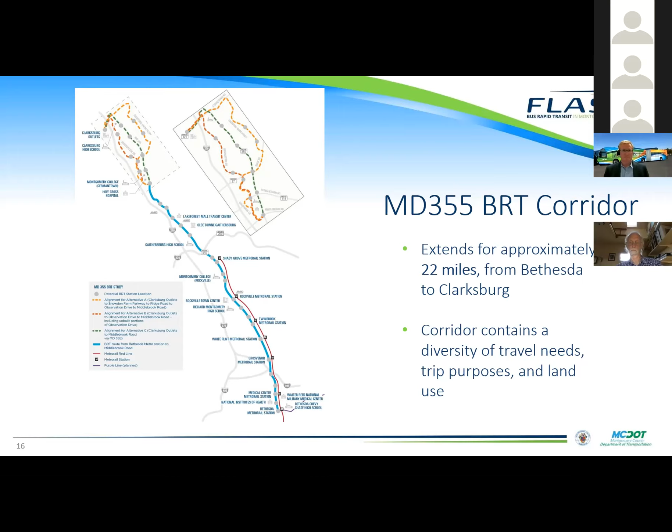Next slide. You all have seen this map already. The corridor extends approximately 22 miles from Bethesda to Clarksburg, and it contains a diversity of travel needs, trip purposes, and land use.

Denny, I'm sorry, I accidentally turned off your video by mistake. I was trying to stop all video. Oh, okay. My apologies. Oh, there. Did you get it? Yep, I'll stop experimenting. All right, great. Okay.

So the design segments, there are 7 design segments, which we've talked about in the past. The project runs from the Bethesda Metro Rail Station in the south to Clarksburg Outlets in the north. You can see this on the map on the right.

For this phase of preliminary design, we are focusing primarily on segments 2 through 6, which includes most of the dedicated running way section. These are the more challenging areas of the project, whereas segments 1 and 7 are operating in mixed traffic, so we aren't focusing on them in this piece of design. However, the BRT service could run beyond the limits of the dedicated infrastructure. Next slide, Randy.

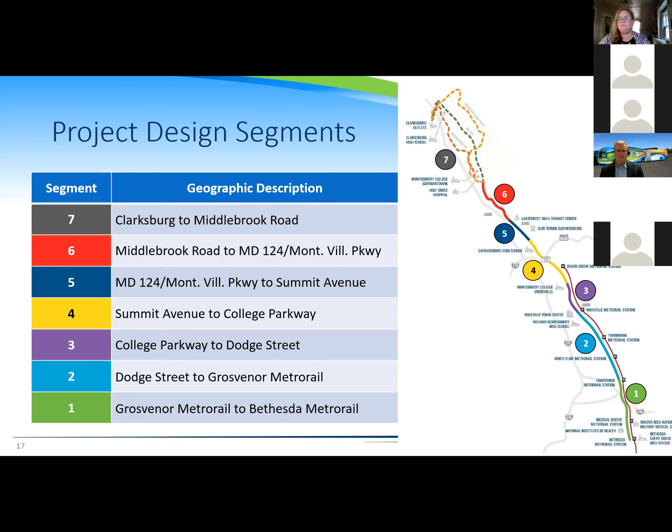Coming out of phase 2 planning, we heard majority support for alternative B modified, including from the County Council T&E Committee, the Transportation and Environment Committee. But there were some questions that weren't quite resolved, so we didn't ask the county to move forward with a locally preferred alternative. We solicited feedback from stakeholders like the cities of Rockville and Gaithersburg, and consequently some of our design ideas have evolved in a few locations, which we'll flesh out as part of preliminary engineering.

The phase 2 planning outcome for alternative B modified includes BRT in dedicated lanes where feasible, a single reversible peak direction dedicated lane north of Rockville in segments 4 through 6, a single fixed southbound dedicated lane in segment 3, and mixed traffic in the far north Clarksburg and South Bethesda segments. We're not focusing on the mixed traffic in the far north and south in this phase of preliminary design.

Two things we're looking at as part of this preliminary design: in segment 3, we may look at different traffic operation treatments rather than just fixed southbound—we might look at it being a peak direction dedicated lane. So we're taking a closer look at the traffic analysis through Rockville, based on feedback from the city of Rockville.

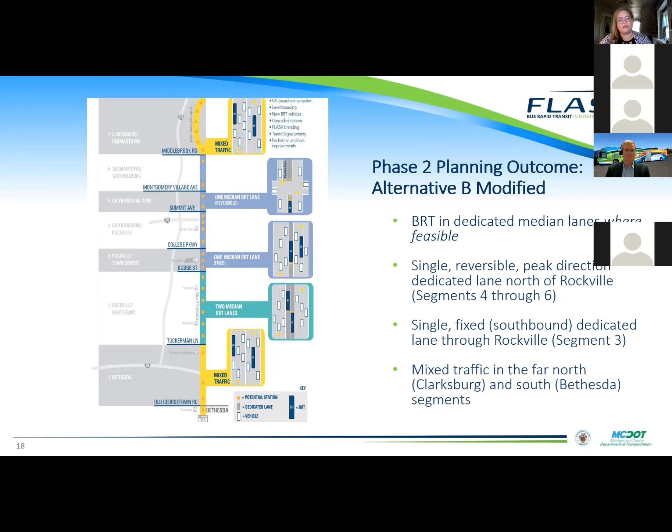So we're taking a look at how we could handle different mixed traffic operations, or something called a business access and transit lane along the curb lane, looking at different technological ways to make mixed traffic operation work a little bit better in the core of Gaithersburg.

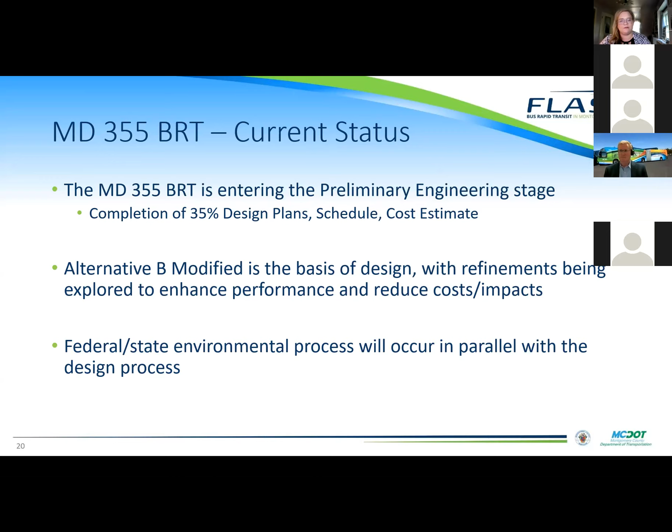Project update and schedule: we are entering the preliminary engineering phase, which includes completion of 35% design plans, a construction schedule, and cost estimate. Alternative B modified is the basis of design, with the refinements previously mentioned being explored to enhance performance and reduce cost and impacts. In addition, federal and state environmental processes will begin and occur in parallel with this design process.

Here's our 'We Are Here' slide, which we've used at many workshops. You were part of phase 1 conceptual planning engineering, where we had previous CAC meetings and looked at all the conceptual alternatives. We identified preliminary impacts and costs, and now we are getting into more detailed preliminary engineering.

We're doing design refinements, surveys, right-of-way, detailed environmental analysis, and detailed schedules and cost estimates. Beyond that, we'll move into more detailed final design and ultimately construction.

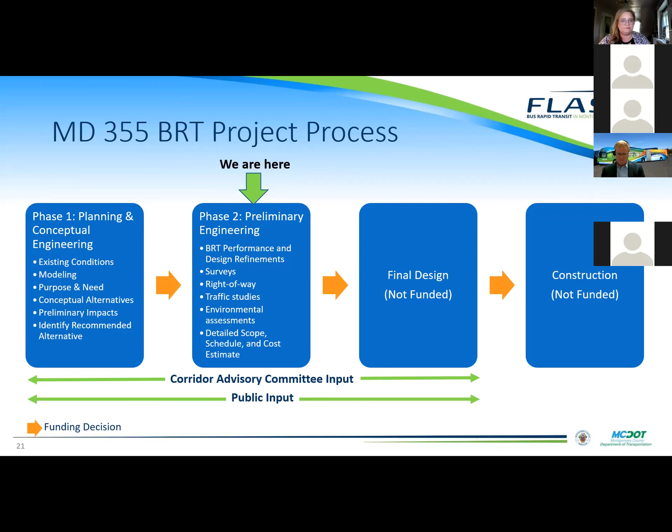Here's a project timeline, another graphic you've seen in the past. We have now stretched it out to reflect where we are in the preliminary engineering phase. We are planning to complete the preliminary engineering by 2022.

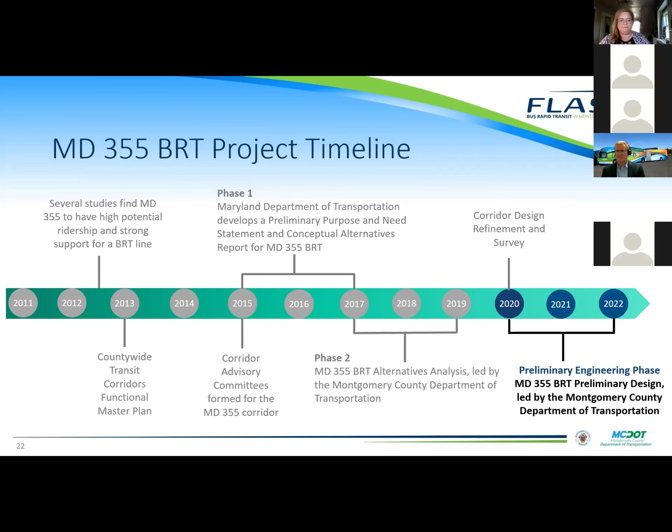Here are key preliminary engineering milestones: the 15% roll plan submission will be completed in summer 2021, with formal adoption of the LPA, locally preferred alternative, in summer or fall of 2021. 25% design progress plans in winter/spring of 2022, then 35% preliminary engineering plans completed in fall 2022, and submission for mandatory referral in fall or winter of 2022.

And then the public review of the environmental process alternative, which might be either a categorical exclusion or an environmental assessment—a NEPA document—in fall or winter of 2022.

Before Randy takes over to talk about some of the design refinements we're looking into and where we're going with it, does anybody have any questions so far?

Okay, thanks, Denny. Can everyone hear me okay? You're all on mute. Let me try to use my cursor pointer if you can see it moving on the slide right now over the title—I'll try to use that to point to some features on the slides.

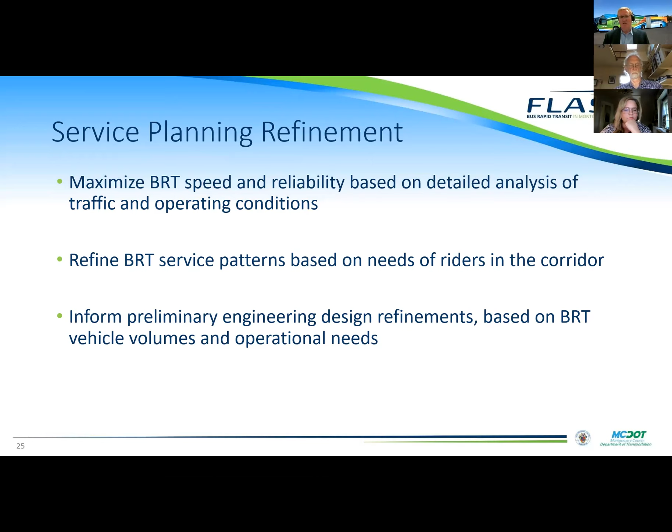Another aspect of the service planning is the combination of the MD355 and Veirs Mill BRTs in a segment from about the Rockville Metro station - just the point where Veirs Mill Road comes into 355, south of Rockville - up through Montgomery College Rockville on the north side of Rockville. As Denny mentioned, there are a number of BRT corridors planned for the county, and these two lines happen to intersect and will be sharing the right-of-way. They'll be sharing stations along this area, providing connections to the south and southeast through the Veirs Mill corridor. So the 355 preliminary engineering team is taking the lead on the design of the shared infrastructure where the 355 and Veirs Mill project intersect. This raises some interesting design questions we're dealing with, and I'll talk in a bit about some of the issues we're looking at around the Montgomery College Rockville campus.

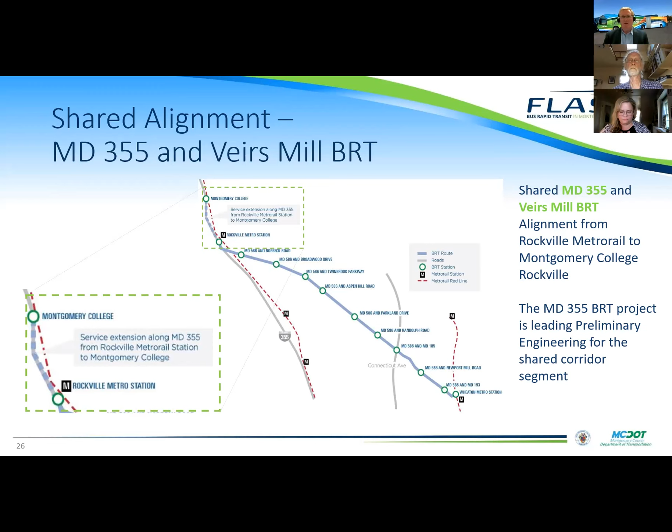There's a dark blue or navy route serving the heart of the 355 corridor. It's really providing connections among all of the destinations, residences, and institutions along the core of the 355 corridor. That was envisioned to run from Lakeforest Transit Center in the north to the Grosvenor Metro area. And then on the south, there's a green pattern - this one running from Montgomery College Rockville down to a terminus near the Bethesda Metro.

Overlapping combined, these provide a very high quality of frequent service of BRT in the area, and also help to provide service that's geared towards different traffic patterns.

One of the things we notice when we look at travel patterns in the data is towards the north, from Clarksburg to Shady Grove, travel is strongly oriented towards commuters, especially access to the Shady Grove Metro Rail as a feeder service. As you go towards the middle of the alignment, it's more about connecting destinations within the corridor. Into the south, it's providing, think of it as kind of a distributor between Metro Rail stations up into the Rockville area.

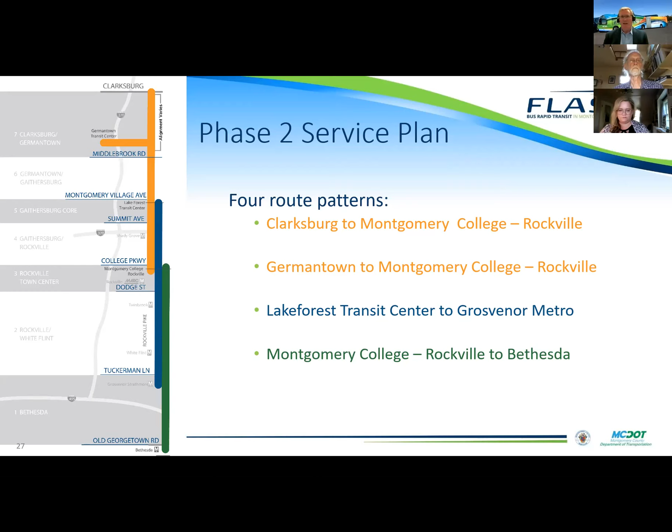As we've been looking at service, we're proposing some revisions to service based on the analysis that's taken place over the last several months for ridership.

The basic overall structure is roughly the same. You can see we have a gold route to the north, a blue route in the center, and a green route to the south. You'll notice that on the extreme north and to the south, we have some changes in the pattern of the line.

On the south, beyond the Grosvenor area, we're looking at another section of the service that is in mixed traffic, south to the Bethesda Metro area. This would be providing service to the extreme south of the corridor.

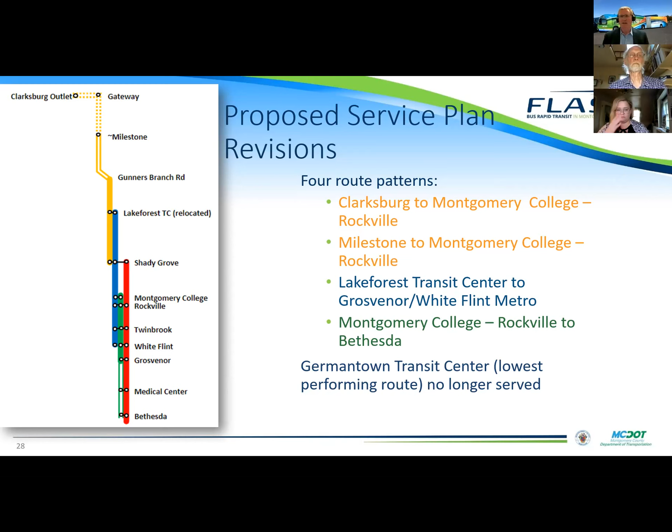Another aspect of the current design is looking at the refinement of the running way. Denny mentioned this in the introduction, looking at ways to improve the overall effectiveness of the BRT running way, but also being conscious of costs, right-of-way impact, and overall traffic performance of the corridor. It's natural in a project like this that as we go through the preliminary engineering phase, we continue to refine the design approaches.

We're also starting to look at a bit more of a fine-tuned level, looking at treatments more intersection by intersection versus overall approaches to the whole segment within the corridor. This allows us to dig a little deeper, fine-tune the approaches, and make sure we're really focusing the infrastructure investments and technologies in ways that provide the most benefit to BRT and the least overall impact to others in the project.

So I'll talk a little bit about 2 segments where we're looking at design treatments and technologies. In terms of technologies, 2 of the major options we have are traffic signal coordination and advanced strategies to manage the traffic signal system, making sure we're being very responsive to the demands of both transit and general traffic flow through the corridor at different times of day and under different conditions.

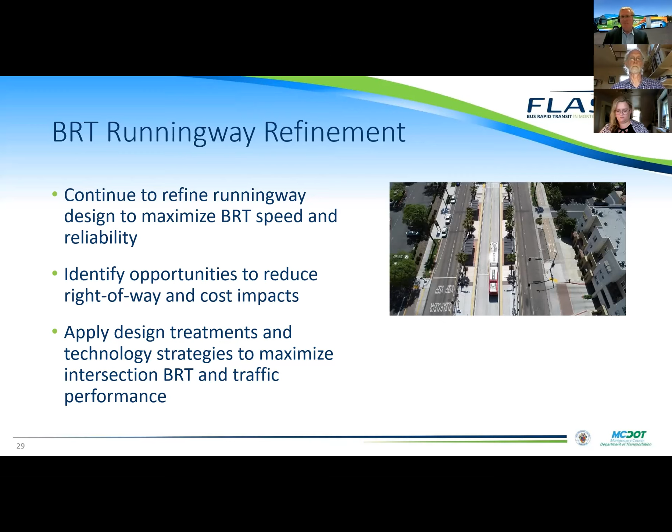We're also looking at applying transit signal priority, which you may have heard of, a treatment that helps give preference to BRT vehicles moving through certain intersections to keep them moving and on schedule, because we know both travel time and reliability of service are going to be really important to attracting riders and making for a quality service. So let's look at 2 segments we're digging into in particular.

The first one I'll talk about is segment number 3. This is through the center of Rockville.

The boundaries are defined as Dodge Street, just south of the metro station, up to College Parkway. As Danny mentioned, in the alternative B modified, this was proposed to have a single dedicated bus rapid transit lane that would operate in the southbound direction.

One of the ideas we're looking to refine through the preliminary engineering phase is whether we can extend operational benefits to the northbound direction as well, by being more precise in how we use the dedicated lane, and looking at other strategies related to intersection technology and infrastructure treatments for BRT.

The other thing that's important about segment 3 is, as I mentioned, this is where the Veirs Mill BRT project intersects with 355. They come together at the Rockville metro area and head north to Montgomery College, Rockville. So looking at the operational performance and infrastructure needs of both lines in combination is something we're looking at in this phase.

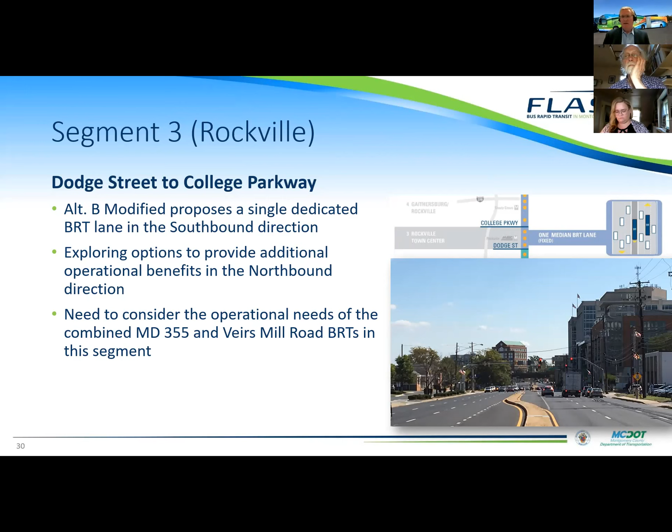This is an area where we envisioned a single lane as well, but in this case it's proposed to be a reversible lane that would operate with the peak travel direction at different times of day. The City of Gaithersburg has expressed a desire to reduce the impacts of the project on the property owners along this segment who would be impacted by the widening of the roadway to implement the reversible lane.

And they've expressed a preference for looking at a mixed traffic configuration, where the BRT vehicles would run in the lanes within the existing cross-section of the roadway. So we're analyzing this now, looking to see if we can come up with a service alternative using a mixed traffic configuration that provides sufficient performance for the BRT and meets the goals of the project, as well as the comments expressed by the city of Gaithersburg.

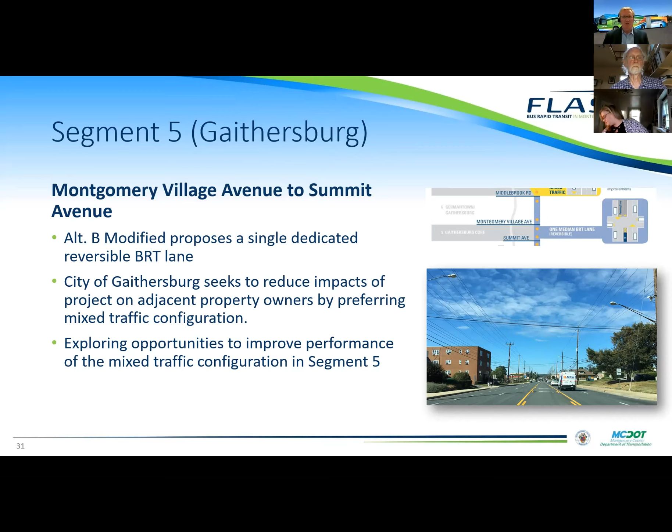With the advancement of the project through preliminary engineering, we're looking at a much more fine level at all the intersections, turn lanes, and different ways the roadway is configured throughout the project, looking for ways to provide additional performance to bus rapid transit and traffic, looking at pedestrian design considerations, and the location of stations and first/last mile access for pedestrians and cyclists to reach those stations and their destinations.

We're looking at technology strategies related to transit signal priority and traffic signal improvements. We're having discussions with WMATA on coordinating the location and design of BRT stations that will be at the Metro Rail Red Line stations, to make sure they're well integrated connections that take into account the design needs of the corridor as well as future plans for the WMATA stations.

And I'll talk about Shady Grove in that context in a moment. We're also looking at the terminals of those different routes. As you might recall from the service planning side, Montgomery College Rockville is one of those really important terminals where routes end and buses pull in, discharge passengers, lay over until their next trip, and then reverse direction. So each of those areas has specific needs in terms of planning the terminals and the operational needs.

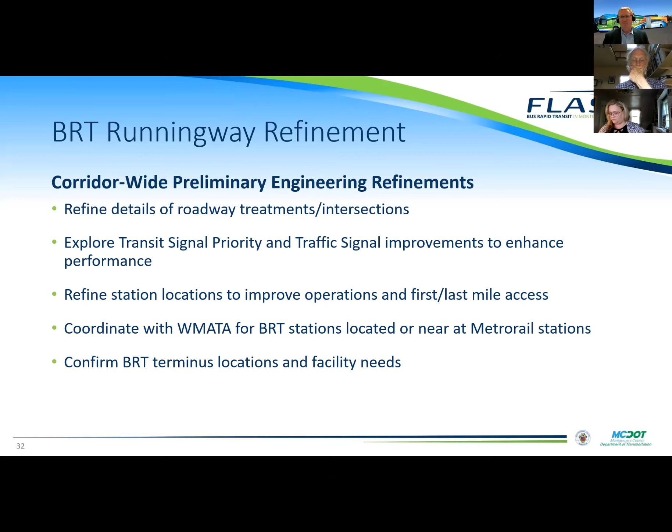So, in terms of analysis and next steps as we're advancing the design, we're looking at some of these potential refinements for segments 3 and 5, as well as opportunities to fine tune the infrastructure design from top to bottom of the entire corridor.

We're conducting analysis of traffic conditions, traffic signal operations, and bus rapid transit operations using microsimulation software, which lets us take a fairly realistic look at how traffic and BRT would perform under simulated conditions. We'll be coming forth in the future with the results of this analysis, looking at design refinements we can recommend to improve the performance of the project or deal with other impacts or comments from the planning phase, and bring that information to inform decision-making on how the project progresses.

I'll take another pause to see if there are any more questions or comments.

Okay, I can only see Denny.

I don't know, Corey, okay, all right. I don't see any hands raised.

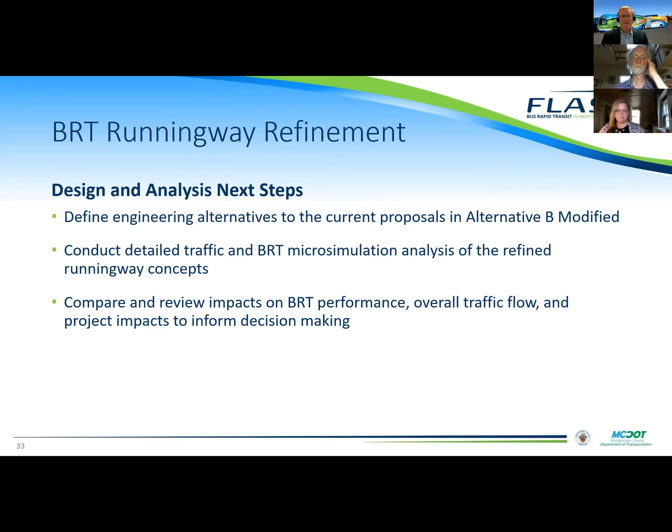Okay, I'll go to the third and last area I wanted to touch on, dealing with refinement of some of the specific station areas and alignment areas within the corridor. Let's start talking about the Shady Grove Metro.

The Shady Grove Metro is the highest ridership station on the MD355 system. It's really important for folks coming from the north, Clarksburg area, Germantown area, accessing Shady Grove and commuting further distances on the Metro Rail system. It's a kind of funnel, and having a good commuter connection to Shady Grove is an important benefit to folks in the northern part of the corridor.

It also provides important connections to the south, going towards Montgomery College, Rockville, and other locations off the Metro Rail. As part of this phase, we're trying to improve the connection between the 355 BRT station located at Shady Grove and the Metro Rail station itself.

The current Alternative B modified platform is proposing a station on Somerville Drive. I'll show you on a map in a moment, which involves a bit of a walk to the station itself. Shady Grove, as you probably know, is also set off a bit from 355, so for folks trying to go up and down 355 with a fast transit connection, it's a bit of a departure to get over to Shady Grove Metro.

So it's kind of a trade-off of making a good connection to Shady Grove, but also providing good direct service north and south through the corridor. We're dealing with some of those challenges there.

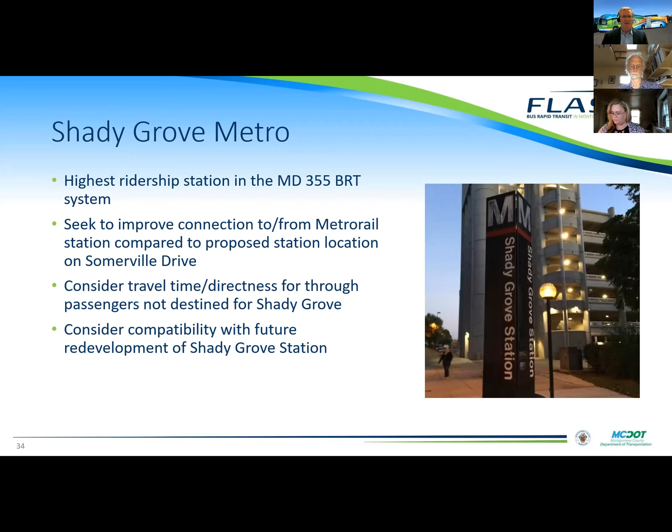But the result is that a substantial number of passengers transferring to and from the 355 BRT at Shady Grove have to walk about 3 to 5 minutes to reach the station head house. So we're looking at ways to try to reconcile this in consultation with WMATA.

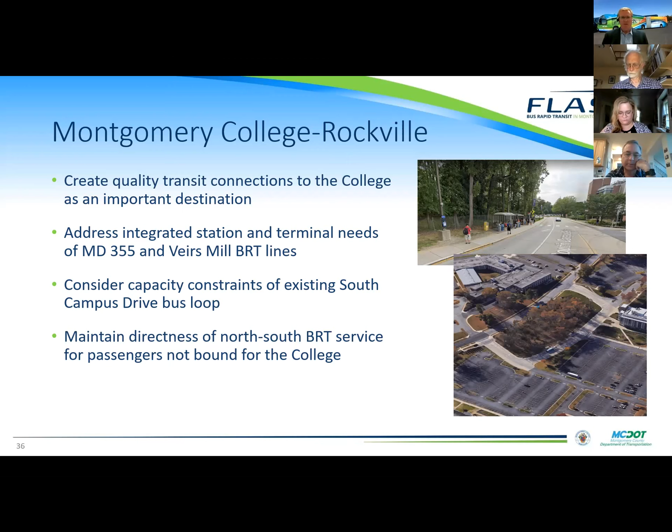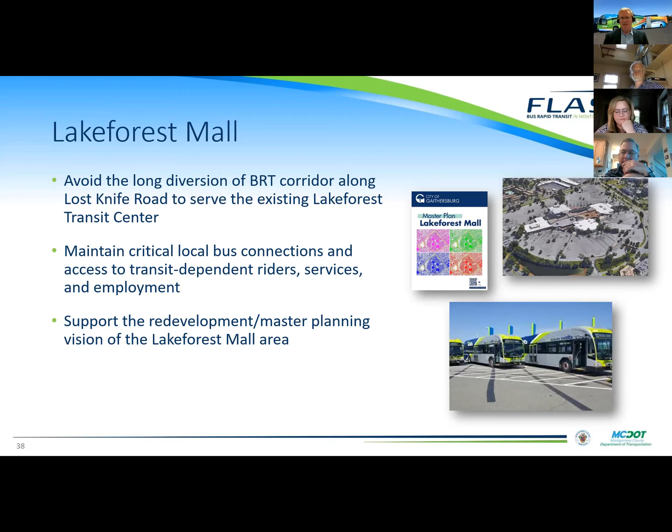One of the good things this route does is avoid a really highly congested and difficult intersection at Montgomery Village Avenue, Maryland 124, and 355. It's just a really tough road for BRT to get through.

But it is quite a diversion, and for folks traveling from the north to the Clarksburg area — think of those passengers trying to get to Shady Grove as directly as possible — this routing turns out to be fairly inconvenient.

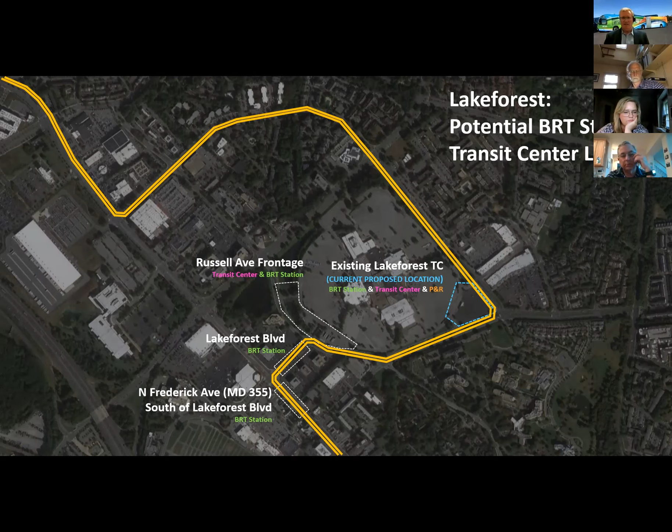Okay, with that, I'll conclude my presentation and turn it back over to Denny for any follow-up discussion or questions.

Thank you. So before we move on to general questions, I would like to open it up to the group to explore some thoughts and see if anybody has questions or preferences on some of these station sites that Randy went over, in each of the three locations — at Lake Forest, at Shady Grove, and at Montgomery College. Were there any of those locations that popped out for you as no-goes, or that you thought had really interesting potential that you'd like to discuss with the larger group?

Denny, I don't think anyone could understand that. Yeah, your mic was really bad. Oh, sorry, yeah.

So the question was, while Denny works through the technical glitches we've all experienced during COVID, I think what she was trying to get at is we'd like to hear some of your thoughts on the various sites that Randy showed this evening for any of the three station locations, whether it be Shady Grove, Montgomery College, or the Lake Forest Mall. Do you have preferences? Do any of them stand out as being good or bad? As we try and move these forward and settle on one location, we really appreciate and look for feedback from the community and those folks who would be using the service as to what they think would be best.

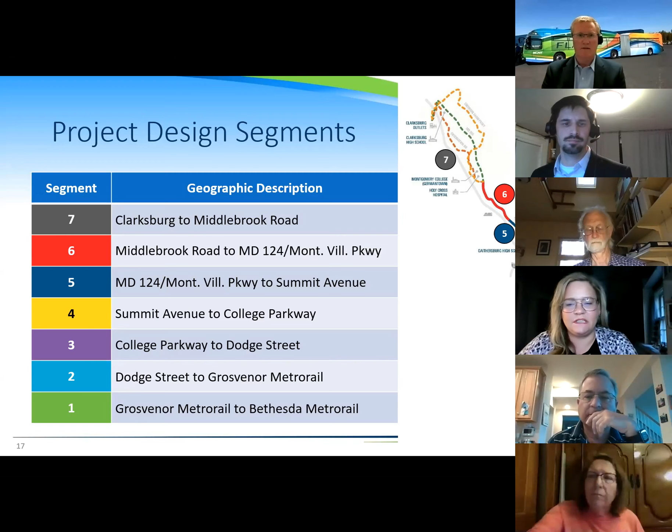Yeah, this project does include that. From the Grosvenor Metro Rail Station. Oh, this is the perfect map, Randy. Thank you. So from Tuckerman Lane near the Grosvenor Metro Rail Station up to Dodge Street, it would be 2 curbed median BRT lanes. Then from Dodge Street up to Summit Avenue, likely some form of 1 median dedicated BRT lane. And then from Montgomery Village Avenue to Middlebrook Road, there would be a dedicated BRT lane. We are looking at doing mixed traffic between Summit Avenue and Montgomery Village, like I said, in the core of Gaithersburg.

If you know that stretch between Summit Avenue—I'm using my hands and you can't see my hands. I feel like Ricky Bobby, I don't know what to do with my hands.

In that segment between Summit Avenue and Montgomery Village Avenue, there are those older buildings that are very close to the roadway. The City of Gaithersburg was extremely concerned about doing any sort of widening that might impact those buildings. So we're taking a look at, as Randy mentioned, traffic signal and transit signal priority, things we could do to still create a premium transit service without having that same level of impact.

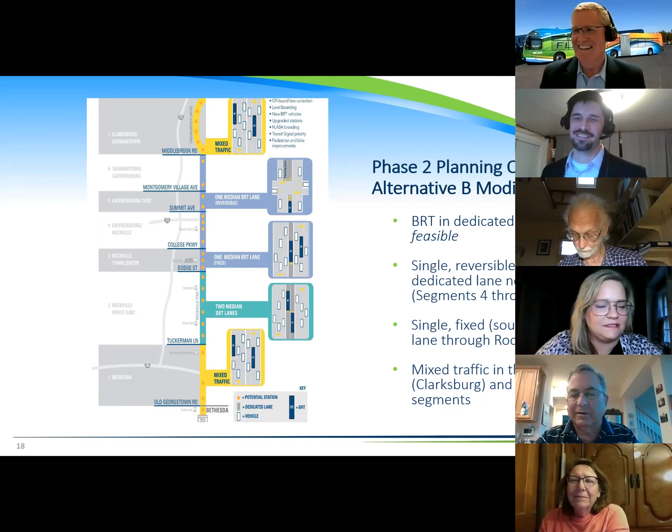Your mic's acting up again, Denny. Can you move the slide, Randy? I just talk loud, I think. I'm not sure I caught that—can somebody translate if you heard it? Can you move to that slide? I apologize, move to that slide. Oh, the Lake Forest—yeah, absolutely. Get back down there, you might need to get a whiteboard, Denny. Keep going, we're almost there.

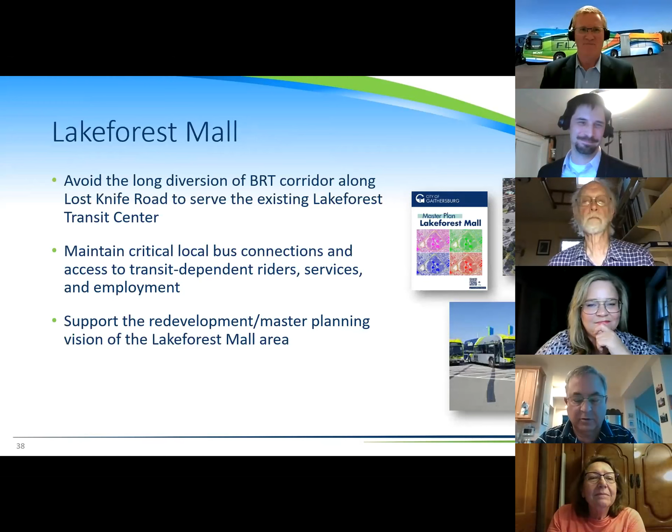Okay, so here's Lake Forest Mall. I don't know if you can see my cursor when I move it on the actual screen, but I'm hovering over Russell Avenue right now. Possibly what the commenter is suggesting is Lakeforest Boulevard to Russell, to Christopher, back to 355. That provides a good balance of connections through this area of Gaithersburg, provides some promising opportunities for connections to Lake Forest Mall redevelopment and the transit center, and still avoids this traffic hotspot at 355 and 124. So we're looking to try to develop that idea.

Any other comments or thoughts on any of the other station locations? I know this group is focused on the more northern portions of the project. I can give you some from the chat: one is, do you know what the future plans are for the Lake Forest Mall property and its potential? The second is, what will be done to protect riders from weather for long walk areas like Lot 13 at Montgomery College and the proposed Shady Grove? Has this been part of the discussions?

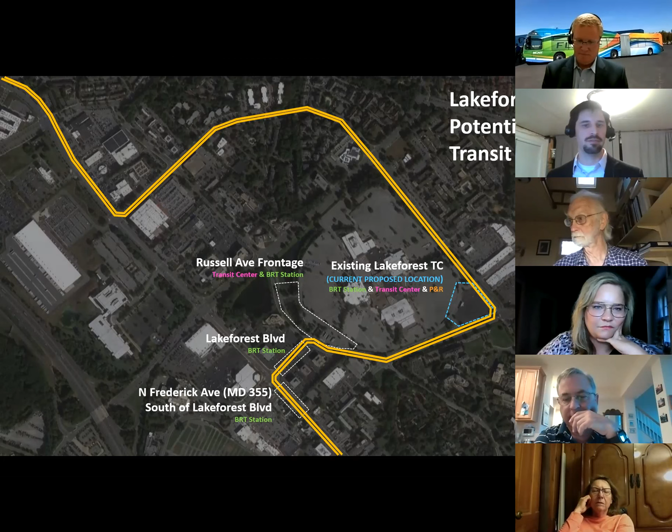So I'll tackle the Lake Forest one. We've been coordinating with city staff at the City of Gaithersburg as they've gone through their master plan process. It's really kind of a visioning document, trying to lay out a vision for what the mall site could be. There are no active proposals, at least that I'm aware of, from the current owner—or owners, since a couple of entities own properties at the mall. So it's yet to be seen what the ultimate plan will be, but the interest is definitely in a more mixed-use type of site with some combination of residential and commercial, trying to make it more walkable and transit-oriented, which would be pretty transformative compared to what's there today. We're just trying to make sure the project is positioned to take advantage of whatever ultimately comes in, and trying to stay as actively engaged with the city as we can.

I guess, Randy, do you want to jump in and tackle the question about Montgomery College? Sure, I'll try. At the BRT stations, they would feature the design of the Flash station kit, with covered shelters and glass partitions for wind and weather protection.

So the waiting area, while still outdoors, would be somewhat protected from everything from the hot sun to torrential downpours. When you leave the platform, obviously, there'd be some walking involved in the elements.

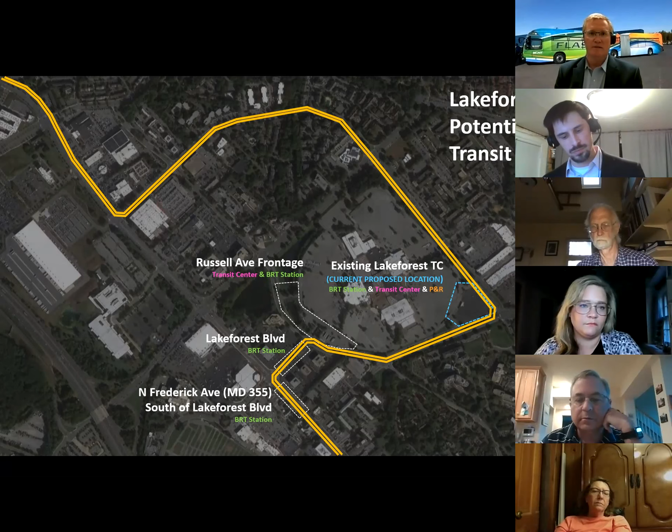Yeah, just kind of a comment. I think that from our meeting, I expressed if it would work out with the school district, I think Lot 13 for the overall system would be the best. I would have some current students who'd probably argue that point with me, because from perception the current loop bus stop is a little closer to some of the buildings. But with the number of routes coming through there, I think coming onto campus is going to slow the overall system down. It could be a lot quicker using Lot 13, but since the school district owns that, and there's a number of complications with that location, from the view shed of the building and things - but if it could work out, I think that's the location that ultimately serves the system best.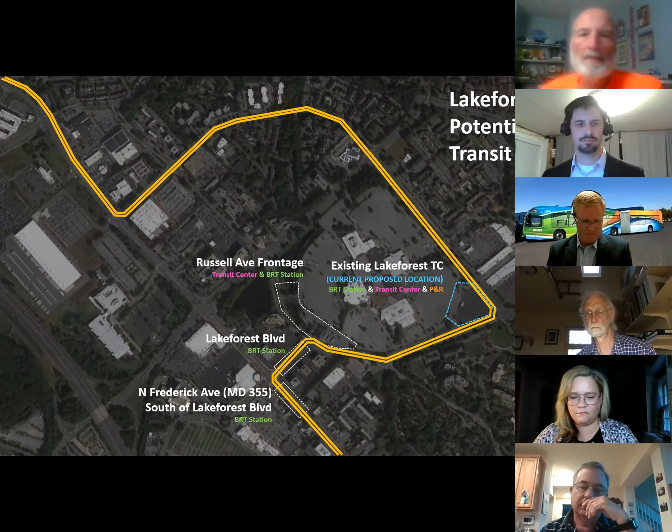Okay, I'll go back to the college slide here just for reference. Yeah, thanks for the comment, Mark. I think you touch on a number of really critical points.

One aspect of the South Campus Loop is, today on the northern curb of Manatee Street is where some of the buses lay over. So if they're terminating at the campus, they may wait a few minutes, the driver takes a break, they're essentially parked on the side of the road, and then they'll pull back into the bus loop to do the boarding of passengers at the bus shelters that are actually on the loop itself. So it's a really growing service. I think it's a really great thing for the college, great for students and faculty to have better transportation options and more service. But it does really start to put pressure on that existing location.

And I think we're really trying to be creative with the options we can put forward, balancing access, balancing directness of service, and as was mentioned in the earlier comments, the connection from the BRT stations to the campus, making sure it's safe and convenient and makes the service attractive.

If the Lot 13 option could provide a greater amount of service in the future, we're a little more limited using the loop. Looking at future expansion of service, we used to park 400 cars in that lot every day with students going back and forth. That's one reason the crosswalk was put in, because of the number of students crossing. Now, pre-COVID, that lot has primarily been used for construction workers for our student services building, and that's gone. So parking on that lot is probably going to be down to less than 25% capacity.

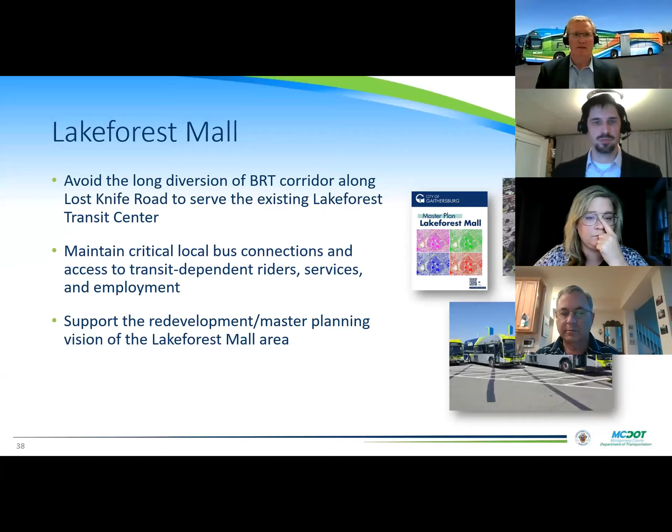Well, let's move on, and I guess I'll take over, Denny, since... How is this? Is this better? Oh, that sounds much better. I think part of it is that my son is downstairs on a Zoom band class and we're sucking up the bandwidth, since he's closer to the router than I am. So I'll go, and if I start breaking up, just interrupt me.

But let's talk about our next steps. As I mentioned, we are working on our 15% plan development, and we are due to have that completed this summer. We are continuing our technical analysis of the BRT service plan, the running way, and station locations. We will be coordinating with FTA and developing a documented categorical exclusion or environmental assessment, which is part of the NEPA environmental process. We will continue to hold stakeholder and community outreach events, including getting back with you all in the fall. Once we complete these roadmaps, we hope to formally adopt our locally preferred alternative, which we call the LPA. Next slide, Randy.

That's it, that's the last slide. All right, so are there any more questions on this or anything else before we wrap up for the night?

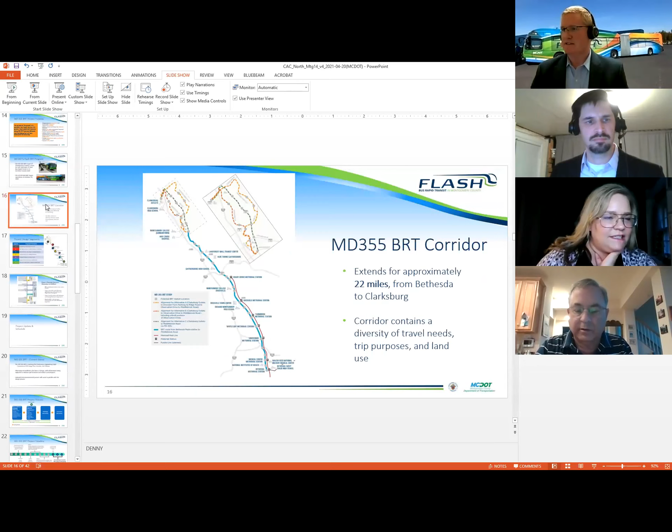We did not discuss them directly. However, the preference that was included in the alternative B modified included the route that went along Snowden Farm Parkway. Randy, if you could go back to the map that shows all of the routes... yes, this one. So the route that was selected is the yellow route there, the easternmost route. We selected that route because it matches where the development has occurred to this point. The other two routes were along existing 355 and along Observation Drive. As you know, a lot of Observation Drive has not been constructed, or portions of it, and it's not in the timeline to be constructed anytime soon. Maryland 355, as you get further north, becomes a 2-lane road and gets far more rural in character. So we felt that going along Snowden Farm Parkway really met the needs of where the development is going in the up-county area.

Anything else? Not on my end. All right, like I said, if you have any other follow-up questions, feel free to email Corey or myself. I think Corey's email address is included in what you received for the link to the meeting, so you can email him, and he can forward it along to me if it's a detailed question, and we will get back to you.